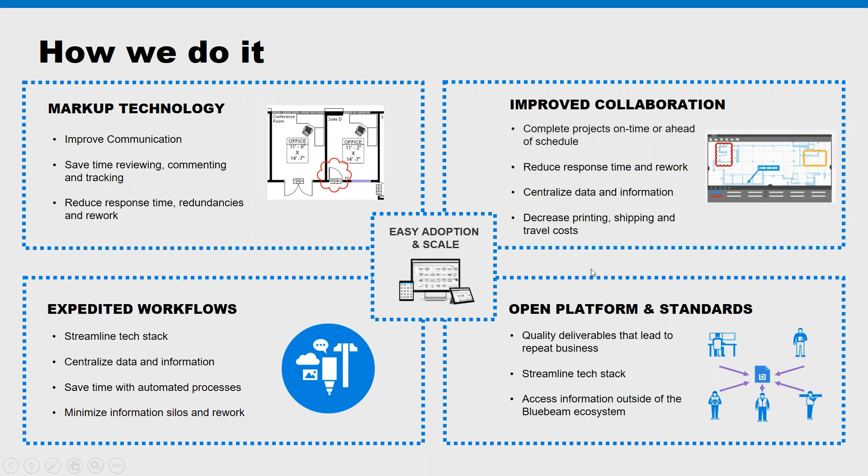And lastly, Bluebeam Revu is really a product that is easy to adopt and scale. So the learning curve is not terribly steep, and it's relatively straightforward to deploy that across your organization and all your different teams. And that's absolutely something that SolidCAD can assist you with as well.

Now, going into Revu 2018, the biggest difference between Revu 2018 versus previous releases is we did have a substantial update to our interface. So our interface is very much new and improved. It's designed to be a lot more intuitive. You can get what you need to get done accomplished in less clicks. It's easier for new users to pick up and learn, and it's easier for existing users to discover new features that maybe they didn't even know about and haven't been able to utilize yet.

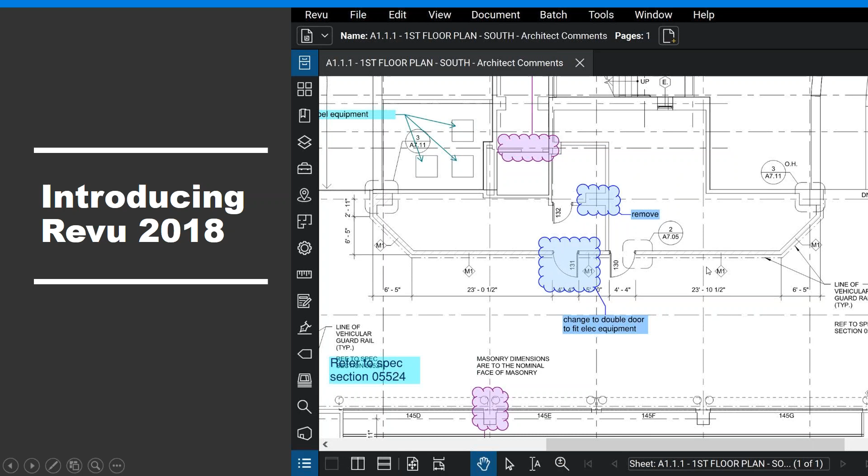So a few other things that are also new in this release, which I'll show you in a live demo very shortly here: we do have a new Properties Toolbar, which makes it a lot easier to adjust markup properties on the fly. We've improved the experience working with our side panel, so it's easier to get to the tools that you're using frequently. Our Studio interface, that cloud collaboration platform, is greatly improved. It's a lot more user-friendly, particularly when uploading files and folders, and I'll show you more about that shortly.

And custom keyboard shortcuts. This is a huge one. Believe it or not, the all-time most requested feature that we've gotten from customer requests, not just in the last year, in the entire history of our company, was custom keyboard shortcuts. And that has become a reality in 2018. So you can now create your own shortcuts for commands or change existing shortcuts to your preferences. And I'll show you that as well.

And lastly, there is now an in-app onboarding experience. So this is going to help your new users, or maybe people who are just new to Revu 2018, to get more quickly acclimated and trained on how to best utilize the software with that in-app onboarding experience.

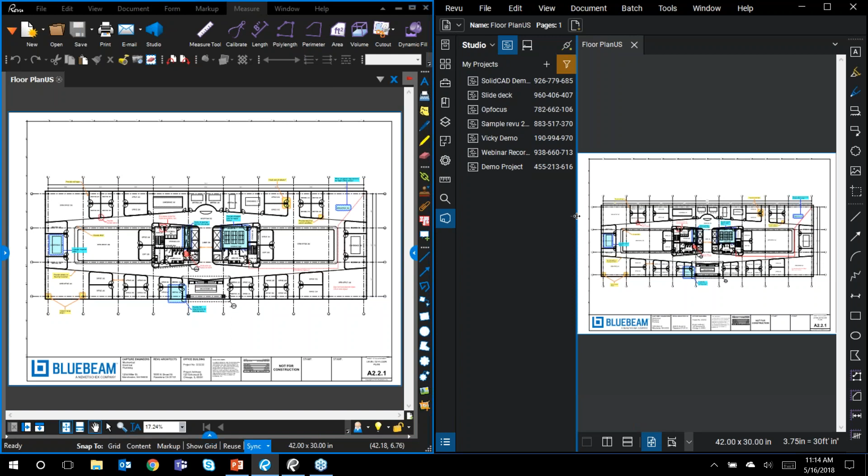Something else that's a quality of life improvement is for this markups list at the bottom. In 2017, the old version on the left, again there's that blue pull tab—I can pull this up and view my markups list there, but it wasn't always super intuitive for folks to find. Now we have this handy button right here where no matter where you are in the software, you can just click it and pop open that markups list in one click for easy access. It just makes accessing the markups list a little easier than before.

Going back to displaying or hiding these tabs, just like in the previous version, you can customize the interface and then save that as what's called a profile. I have all these different profiles loaded in the software ahead of time, and you can see I actually made a custom profile as well. If I jump into that custom profile, it adjusts the interface to exactly how I had it set up, with the tools and tabs I want toggled on. So profiles did exist in the old versions as well.

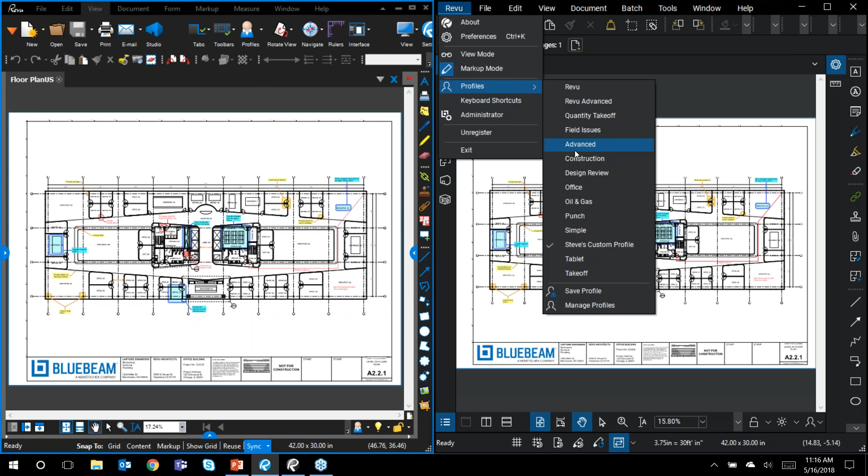They just live in a slightly different location. In the old version, I had to go to View, and it would show up in my ribbon, then I could select the profile that way. In the new version, I've got this Revu drop-down right here, easy for me to select, and I can switch profiles that way. So just a little easier to find and use than before.

Something else I want to jump into that's an enhancement in the 2018 interface is what's called the Dynamic Properties Toolbar. Essentially, this toolbar at the top is going to dynamically change depending on what I'm doing in the software, giving me quick and easy access to settings most appropriate to whatever I'm doing. Right now, since I just have a document open and I'm not doing any markups or anything special, the dynamic properties are pretty simple—it's just showing me the document properties.

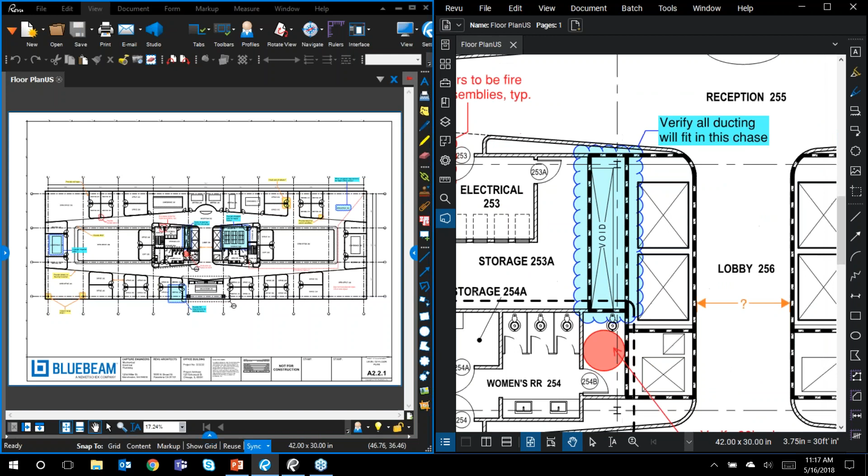Now if I zoom in and select this markup as an example, you'll notice this properties panel or properties toolbar has changed now. So now I have all of these different visual properties that I can adjust on the fly, so maybe I want to change that line to green and my fill to be green.

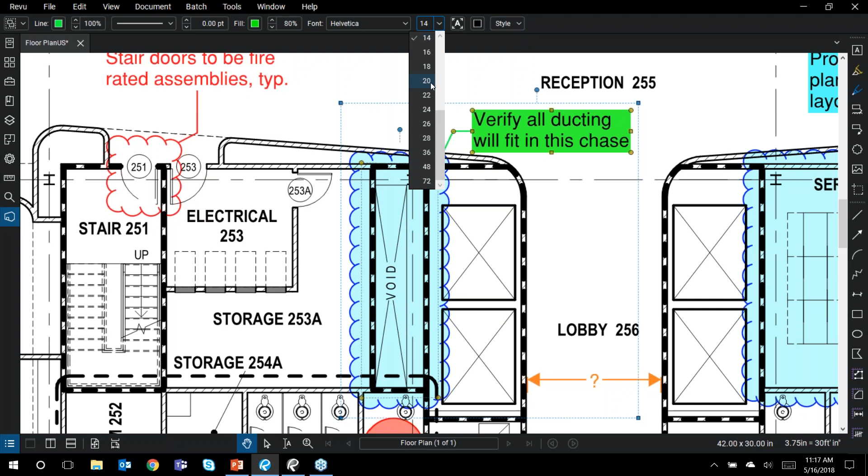And maybe I want to change my font size and so on and so forth. I can adjust that sort of on the fly very quickly there.

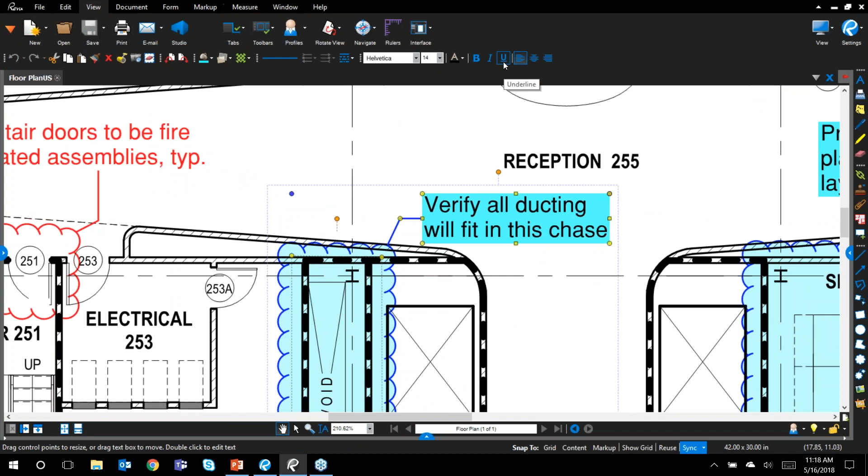Now how this compares to 2017, if I jump into the old version, let's select that exact same markup. You'll notice when I select it in the old version, I don't have necessarily all the properties right at the top. I need to dive into the side panel, find this properties tab, and then I can update some of the visual properties here.

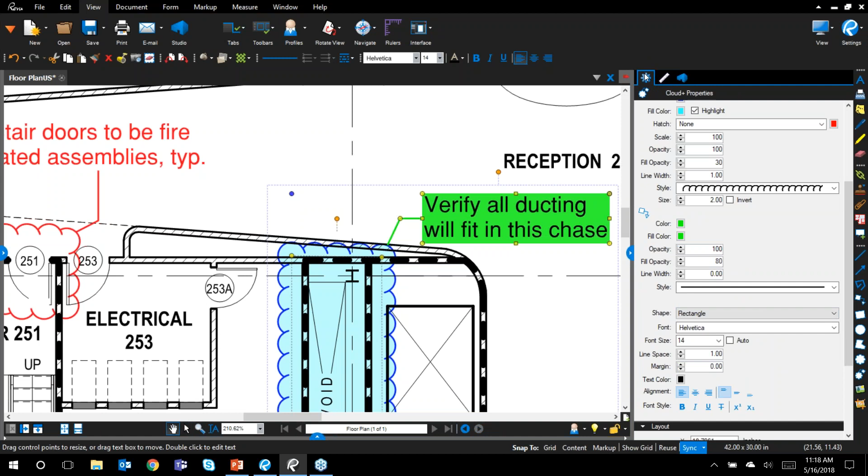Now, it's not that this is a really terribly cumbersome process, but it's just not super intuitive, particularly for new users, to know that you have to specifically go into the side panel and find this one tab to update it. So the new version is just a lot more user-friendly. You can just select the markup and you've got all your properties right here at the top, easy access. So that's a big improvement, quality of life improvement in 2018, that dynamic properties toolbar.

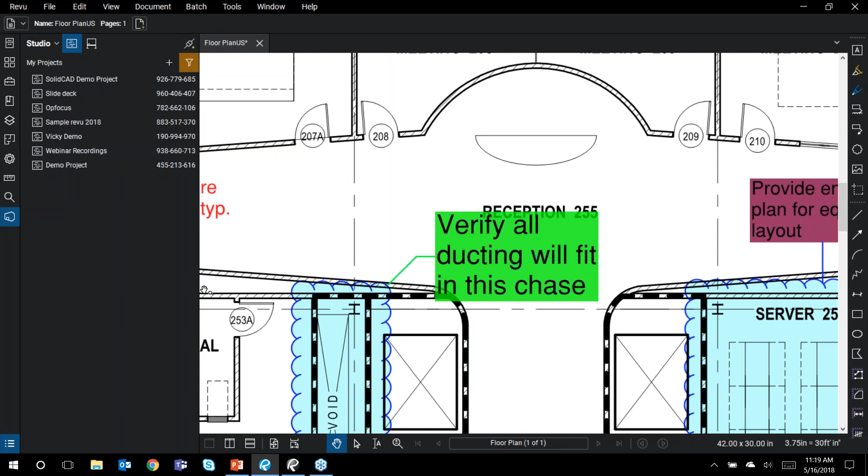Now let's go back into talking about some of these side panels here. Let's pop open the side panel again. I want to use my tool chest as an example here. So for the folks on the line that have used Bluebeam Revu before, you've probably had some experience working with the tool chest where you can save custom markups.

One piece of feedback that we got from a lot of customers is it would be nice to easily be able to adjust the size of these thumbnail images, and this is something you can do in 2018 now. So we've got this handy slider here. I can just on the fly adjust these icons to be smaller if I want to see more icons at a time, or larger if I want them to be more easily visible.

This is particularly useful if, let's say, you're working on a small laptop screen, or maybe on a Surface Pro tablet, and you want these icons to be very large and easy to select. You can scale them larger, or vice versa. So really nice to have that flexibility.

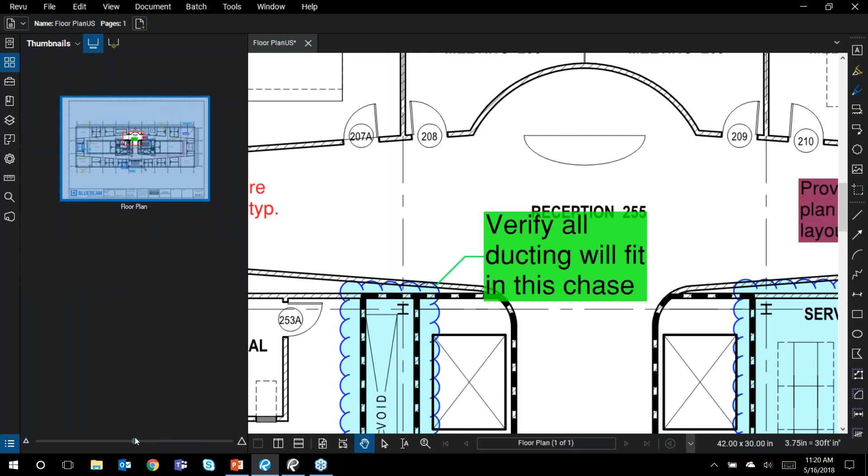You can do the same on the other tabs. So for example, I'm on my thumbnails panel where I can see a thumbnail of this page we're looking at. I can adjust this to be larger or smaller as well. So some nice improved flexibility there.

Looking at the tool chest, another improvement that we've implemented is we've made it easier to toggle different tool sets off and on. So looking at the tool chest, I've got my architect review tool set, my contractor review tool set, my engineer review tool set, and several more.

If I want to toggle these off and on, now up here at the top in tool chest, I can just click this dropdown and you can see all these selected. If I want to toggle off my contractor review tools, I can just click that and you'll notice that they're now hidden. If I want to bring them back, I just select that and toggle them back on. So just a lot more easier, on the fly adjustments to the different tool sets that you're using. That's another improvement in the 2018 version.

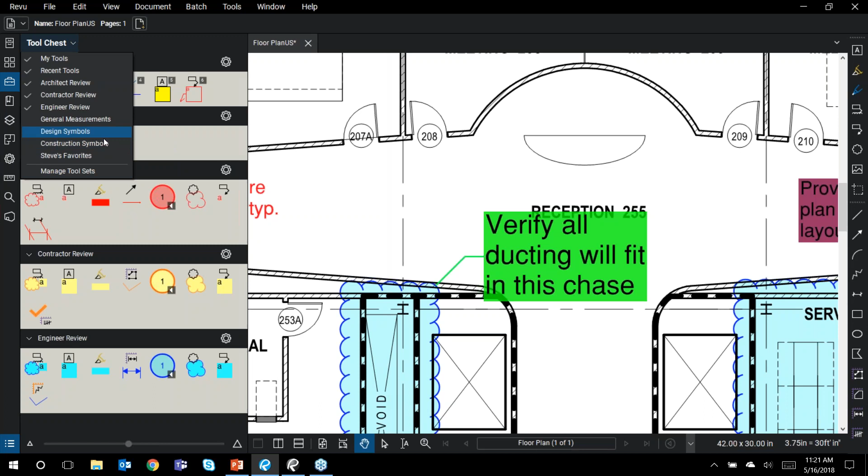Something else that I want to dive into that is a little easier is, in the markups list, managing your columns. So in the past, the way that I would adjust some of the columns in my markups list, let's go back to the old version.

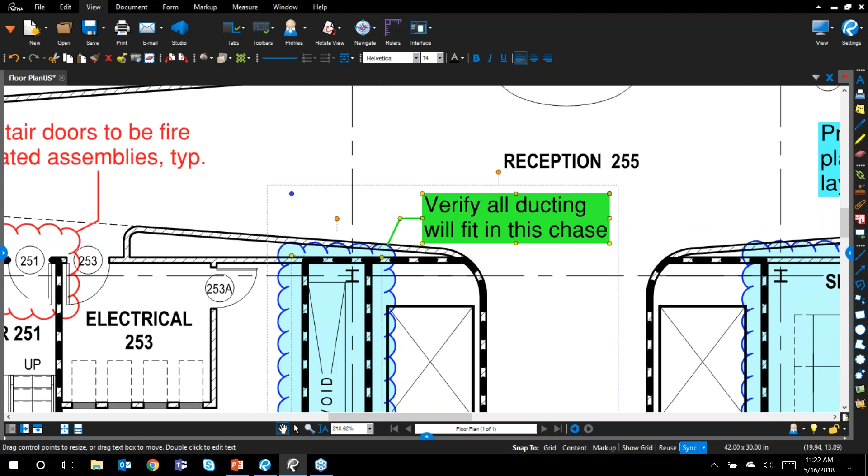So we're back in the old version, 2017, now. The way that I would adjust these columns in the past is I open the markups list and I have a specific dropdown just for columns here, and this is where I would toggle them off or on.

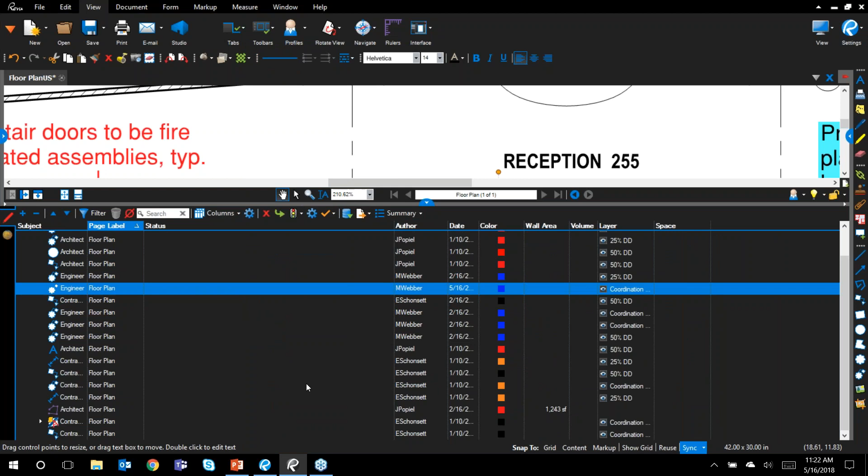That's not terrible by any means, but in the new version, rather than having a totally separate drop down just for columns, now I can just click this markups list drop down, and right here at my fingertips, I've got all of my options for columns again, so I can toggle these off and on however I would like. And then also in that same drop down, I've got my markups options to import markups from other users.

If somebody else independently marked up their own copy of this drawing and I just want to pull in all their markups onto my copy, import would allow me to do that. Or if I want to export markups to somebody else, I can do that here.

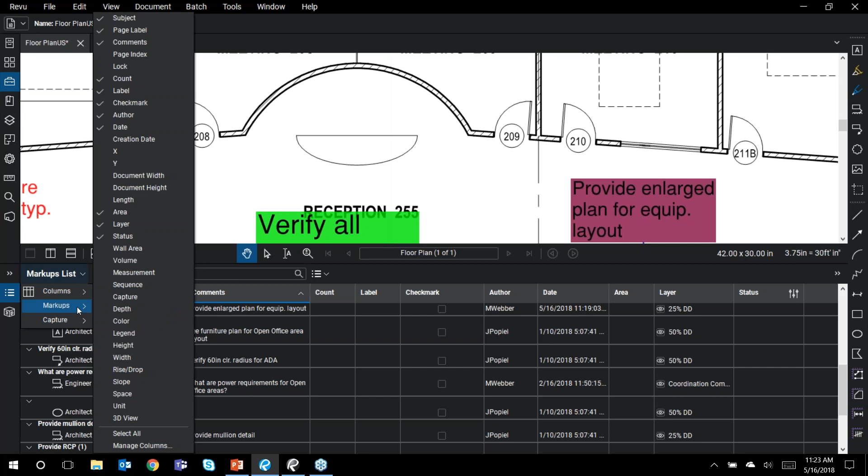And then lastly, capture. If I want to create a capture summary or export my capture media, I can easily do it here. So what's happened here is we've taken three separate menus or drop downs, and we've consolidated it into one cohesive drop down. So you're able to get to what you need to do faster and with less clicks.

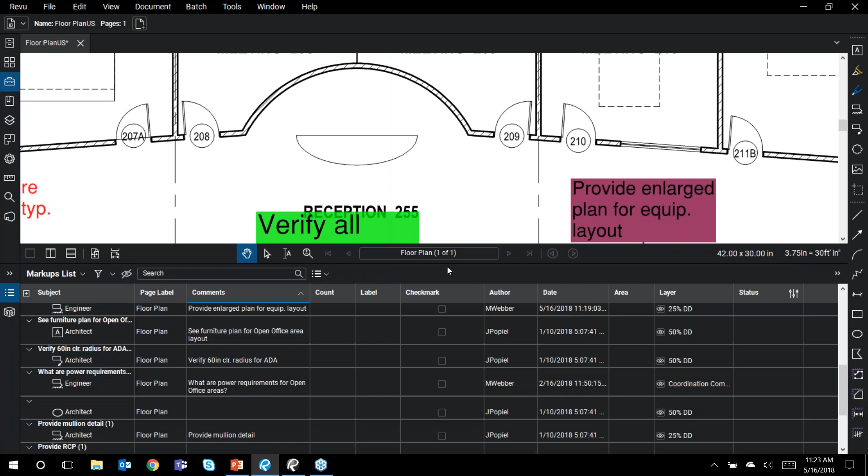Something else that's really neat that we've introduced in 2018 is this button right here to quickly hide markups. So if I want to view this drawing without any markups on it, I can just click on this hide markups button and immediately toggle off all of the markups so that I'm just looking at the PDF content. And then vice versa, I can click it and bring all of my markups back. This was another very commonly requested feature that we've implemented in 2018, and I think it's really, really super helpful.

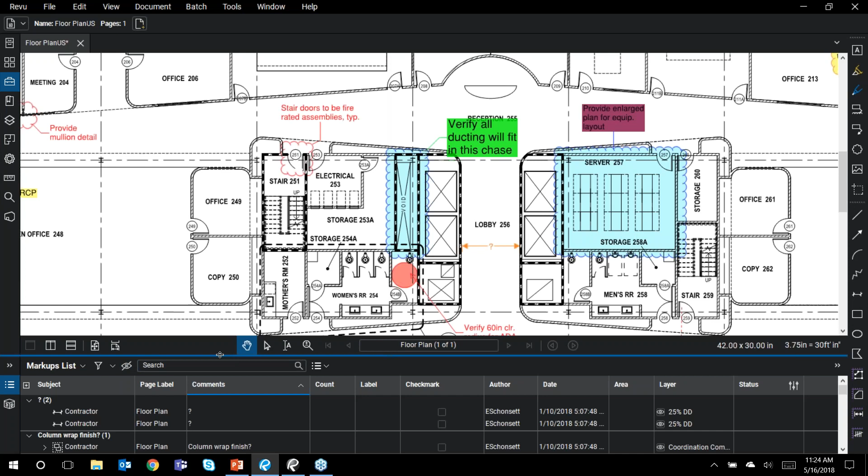Something else that is a little easier in 2018 is setting up filters. So right here, I now have an option to immediately clear all of my filters if I so choose. Before I had to toggle off each individual filter. And just like before, you're able to filter on any column that you would like.

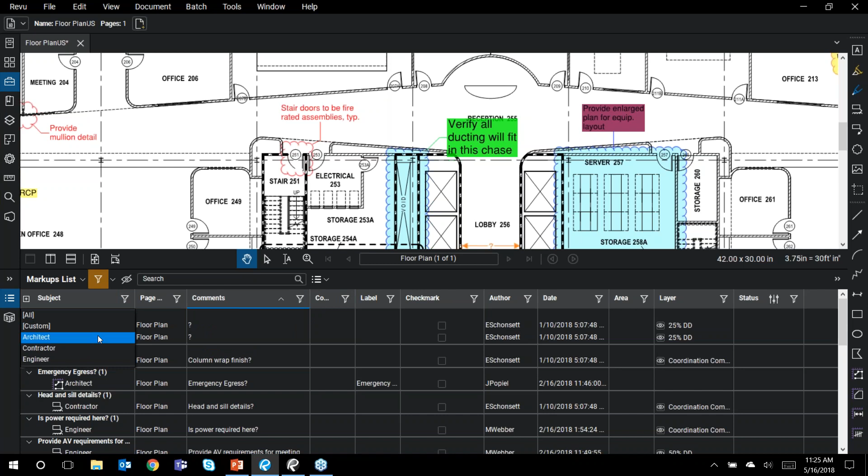So as I'm clicking this filter, you'll notice the different options that are presented to me. I'll use subject as an example, and let's filter down to only my architect comments. You'll notice as we look at the drawing that only my architect comments are still in color, so they pop out at you. The other markups are sort of grayed out, so it makes them not as visible.

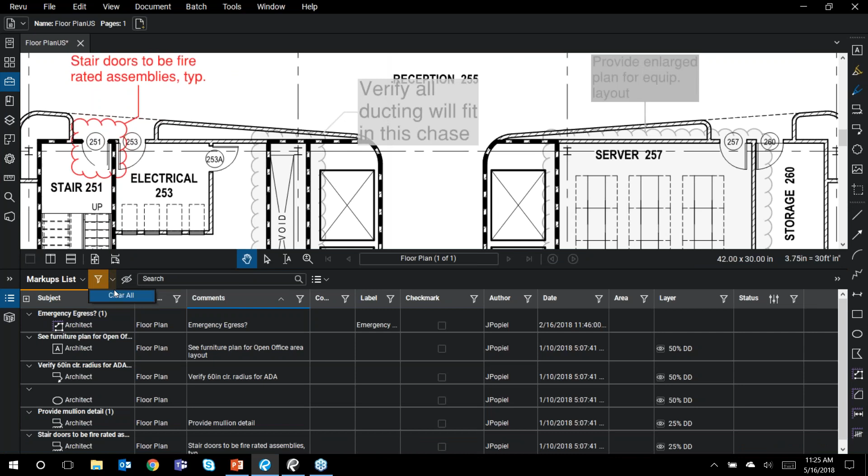But I can just go clear all and clear those filters and bring back all those markups there. So just a little easier usability in terms of filtering the markups list.

Something else that's new and really cool in this version is when you're doing a markups list summary. Let's say I'm going to do a PDF summary. In the past, you could only export a summary for the specific document that you happen to be looking at. But in the new version, I can do multiple files. So if I wanted to add more files or more folders and subfolders and do just one giant markup summary report for all those different documents, I can do that right from the summary page.

Additionally, in the past, before you did the summary, you had to set up all your filters and columns in the markups list ahead of time in order to get the export that you wanted. It was really something that you had to know about ahead of time, so it wasn't super user-friendly to change on the fly. That's no longer the case.

Now I can quickly apply additional filters right here from the summary page, and I can also toggle off and on whatever specific columns I want to be on this report easily from this summary page as well. So this is another quality of life improvement, giving you a lot more flexibility to adjust what shows up on your summary report without having to know exactly how you want to have it set up ahead of time. So just a lot more user friendly.

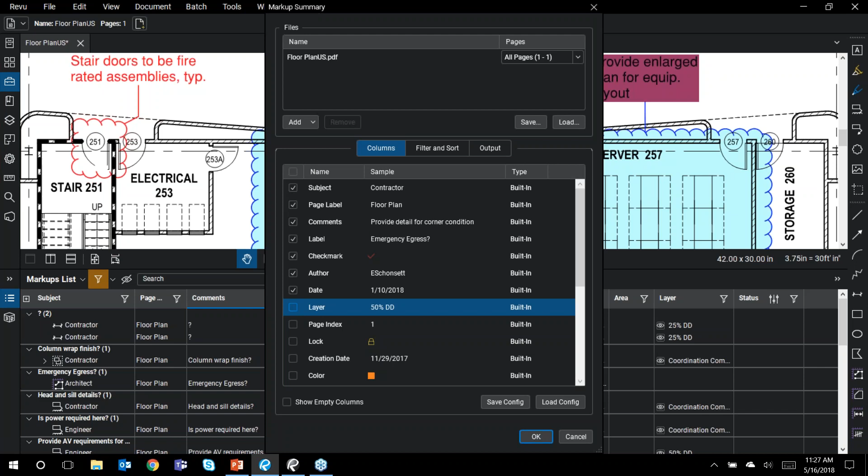So let's switch gears and talk about Studio. Studio is our cloud collaboration platform. It's included with all of our versions of Revu. So if you have seats of Revu, you already have access to Studio. And I'm going to show you the Studio experience in the old version and then in the new version so we can compare and contrast.

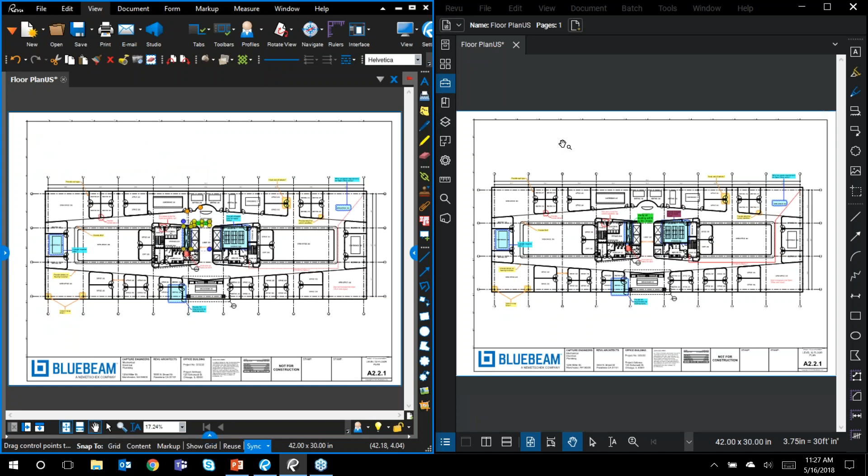So let's go back to our split screen view. I'll go ahead and hide that right there. Let's go back to split screen and view them side by side. Again, I've got the old version on the left-hand side of the screen and the new version on the right-hand side of the screen. In the old version, the way that you would access Studio is you would go into whichever side panel you had Studio on. You click on Studio and go ahead and log in.

You have all of your sessions and projects that show up in one long list, so you find the one that you're looking for. I'm going to go into the SolidCAD demo project.

In Studio Projects, you have this folder structure depending on how you upload things. You can double click on these files to open them up. Studio Projects is sort of a check-in, check-out model, so only one person can actively be making changes to one document at a time. I basically click on this drop-down and I can check out this drawing and start working on it.

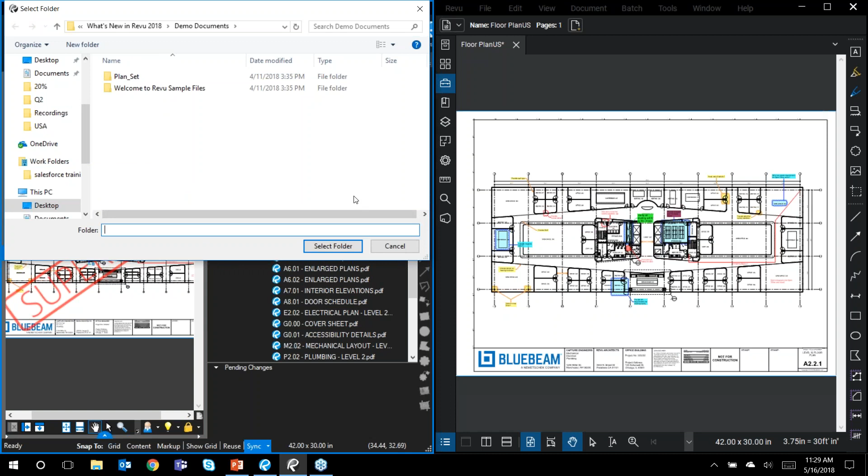When I'm done, I can check it back in to update the server copy. Now, what was challenging about this older version is that if I wanted to add in files or folders, I could not simply click and drag them in. I had to right click and then upload files or upload folders, and then find where those files or folders were saved on my hard drive. So just a few extra clicks to find what you're looking for.

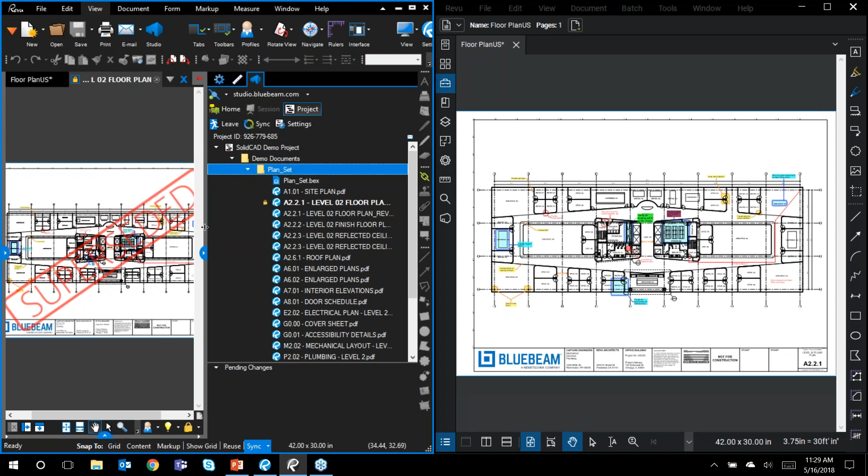Something else that was challenging about projects in the old version is that if you were working with multiple Studio projects and wanted to bounce between them, you were limited to only having one Studio project open at a time. So if I needed to switch to another one, I had to completely leave the project I was working on and then jump into that other project. Again, just not the most user-friendly experience if you're jumping between lots of Studio projects.

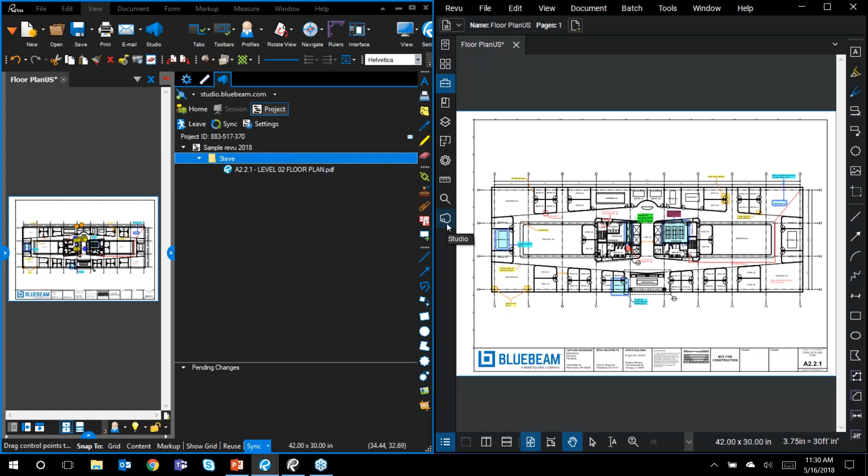So let's switch gears and look at that in 2018, in the new version. On the right-hand side of my screen, I access Studio from this handy icon right here. And unlike the old one, which just showed you a slightly intimidating list of all your sessions and projects in one big list, it breaks it out into projects and sessions, so I can quickly toggle between the two.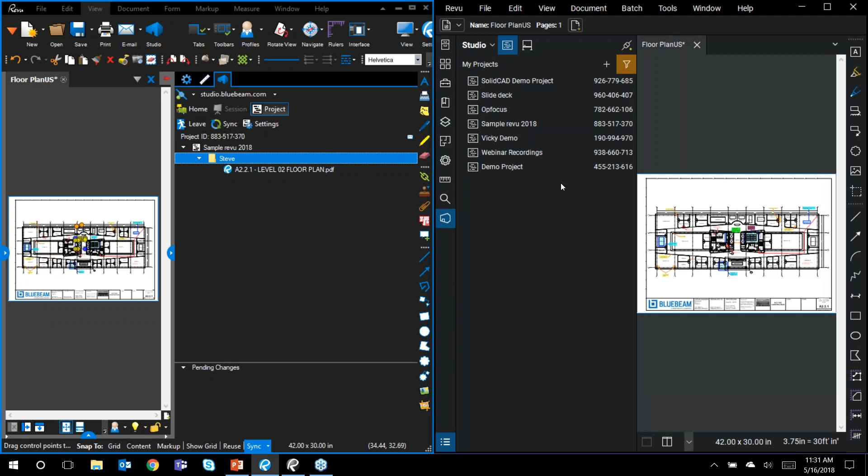I've also got these handy filters where I can filter it down to just my sessions or projects that I've created, or just other people's that I've attended, or I can see everything, or sort by when I most recently accessed them, name, or ID. It just makes it a lot easier to navigate. If you've got a lot of sessions and projects you're working with, it makes it easier to find specifically what you need.

I'm going to go ahead and maximize this so it's a little easier to see. Now let's jump into that SolidCAD demo project again, and you'll notice the interface looks substantially different. I still have this folder tree structure in the side panel that I can click through if I want, but I can also click through some of the folders right here in the middle of my screen to navigate around there too.

Now, something else that's really cool is in the new version of Revu in Studio, you can click and drag files and folders into here. It's almost like the functionality you'd see in Google Drive or Dropbox, where you can just drag in a folder. It makes it easy to do that.

So let me actually just pick something to upload here. How about this material takeoff PDF? I'm just going to click and drag it, and you'll notice that it just dropped right there into my Studio project. So a lot easier to upload stuff in there.

Something else that's really cool working with Studio in 2018 is you can have multiple projects open at the same time. So let's say I also need to work on this demo project and grab some files from there. I can double click that, and it's just going to open up this project in another tab. So I am in two different projects at the exact same time, and that's no problem at all.

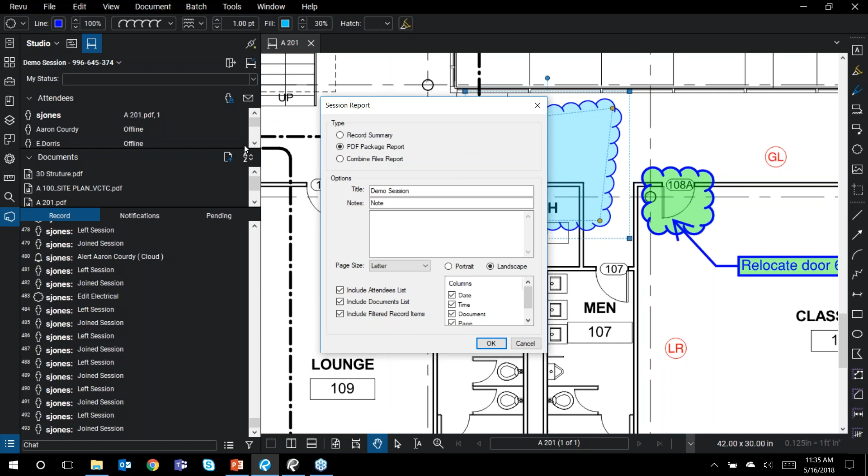So the next thing I want to jump into is talking about custom keyboard shortcuts. This is actually something I cannot show side by side with the old version because it didn't even exist at all in the previous version.

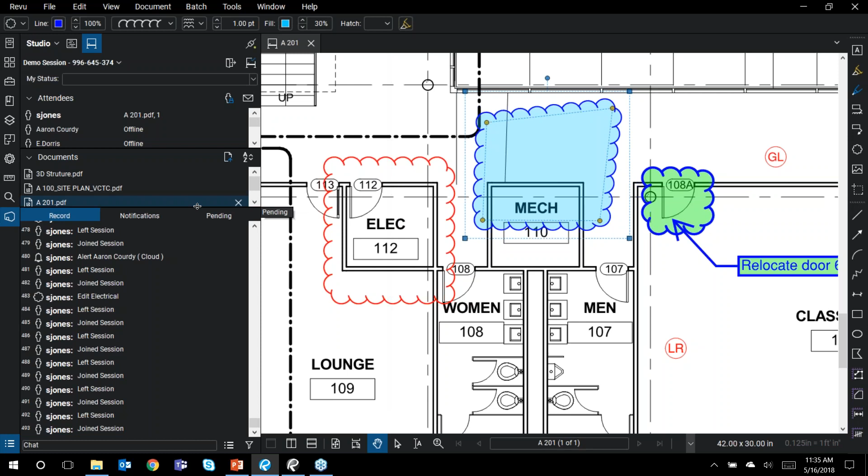A really common request was to be able to create custom keyboard shortcuts or override the defaults for keyboard shortcuts. And the way you do that in 2018 is right here in this Revu drop-down in the top left. I've got keyboard shortcuts right here. So just 2 clicks and I could get to all my keyboard shortcuts.

You can see all of the default keyboard shortcuts for markup tools here. And then also up here at the top, I can toggle over to commands, and you can see some of my different commands as well. Not all of them necessarily have hotkeys assigned, but you can absolutely assign some of your own.

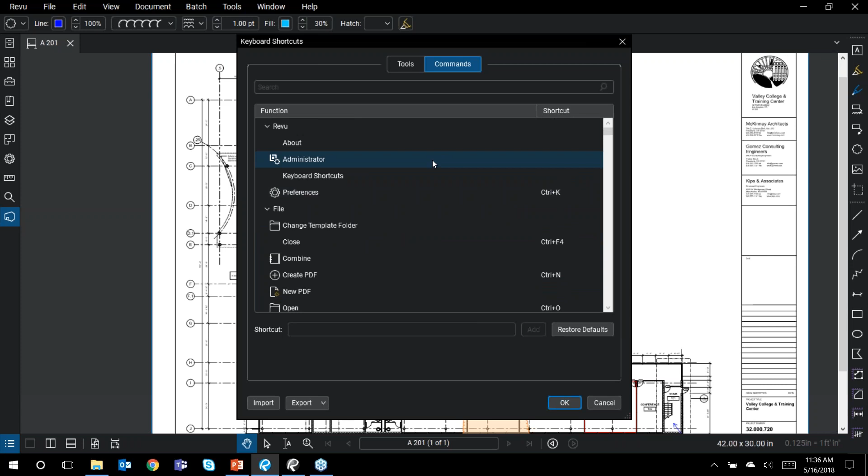So let's take a look at how to do that. I'm going to use this arrow tool as an example. Let's say that for my specific workflow, I'm using the arrow hotkey constantly, and I really don't want it to be A—I want it to be Q instead of A.

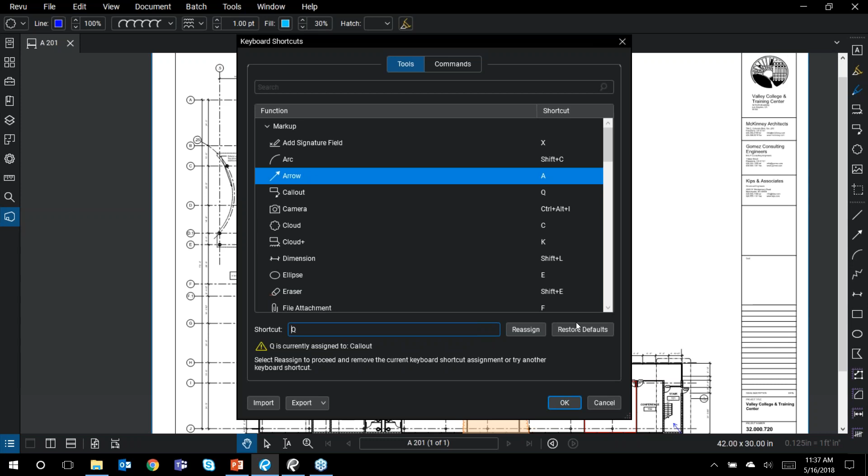So what I'm going to do is select this arrow, and it's telling me the shortcut is A. So I'm going to delete that and do Q instead. And what it's telling me here is that Q is actually already assigned to another tool—it's assigned to my callout. And I have a couple of options here.

One is that I can just look for some other options, maybe T or M, etc., so I can keep looking for something available. Or if I don't want to do that, I just want to override whatever was taking that hotkey, so I can just do reassign. You can see I just reassigned arrow to be Q now. So now anytime I hit Q, it'll jump to my arrow key.

Now, callout used to be Q. I overrode that, so it just deleted the hotkey for callout. So let's say I want callout to be A. I can go ahead and set it as A and add, and now I've got a hotkey for callout as well. So very easy to update this stuff on the fly.

And hotkeys, just like profiles and tool sets, can be exported out to other users. So if you want to export your settings and share them with other users, you can absolutely do that. Conversely, if you want to import hotkeys that somebody else sent you, you can do that from this import command right there.

This is particularly useful. Let's say your organization has certain teams repeatedly using specific markup tools, and you want to make it easier on your users by setting up some hotkeys for them. You can do that and then easily share those across all your different users.

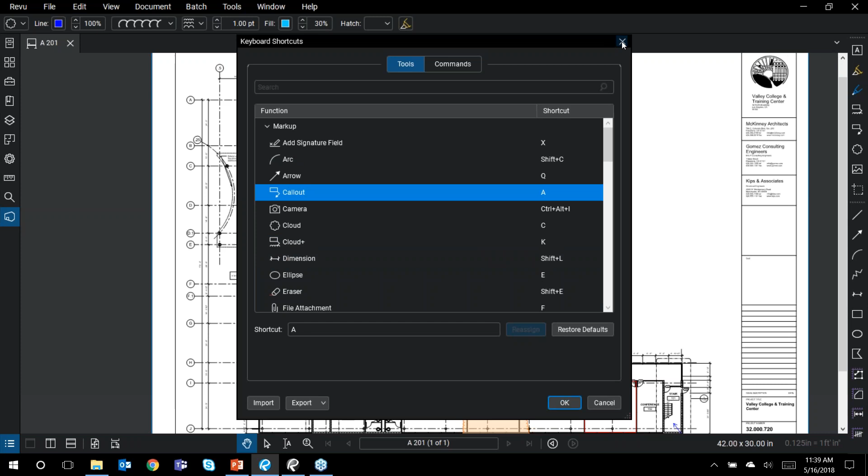From here, I want to go into that in-app onboarding experience. For brand new Revu 2018 users, the first time they open up the software, there's an in-app onboarding experience to make that process a little easier and help them get acclimated more quickly. If you go to the Help menu, Welcome to Revu, this is what you'll see by default the first time you open Revu 2018. This is immediately going to pop up.

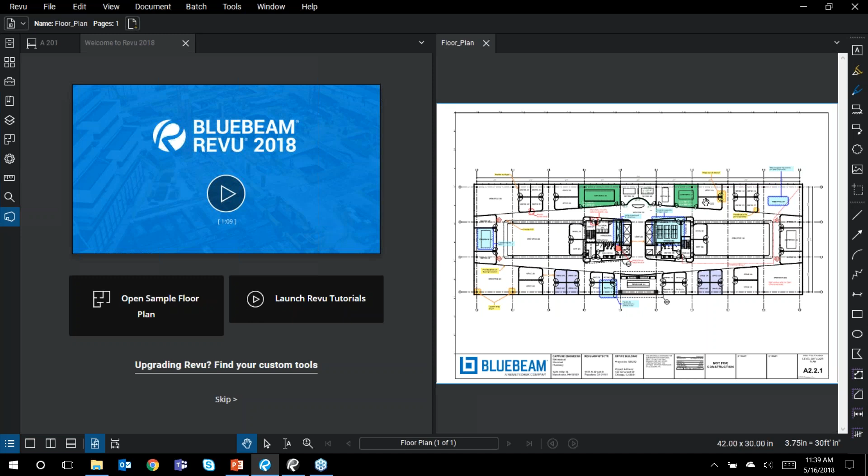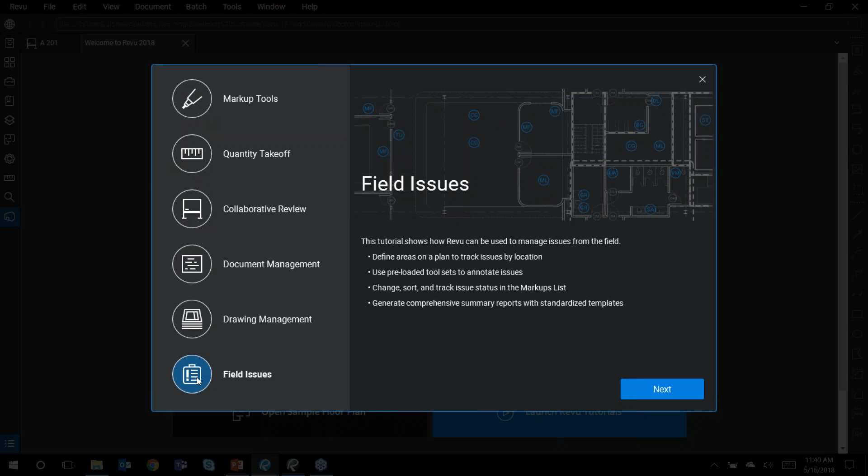You have a cool, one minute quick overview video of 2018. You've got a sample floor plan right here in the software. If you click that, this is the exact same floor plan we've been looking at in this webinar, so you'll actually have a copy of your own that you can test and train on. We've also got Revu tutorials - specific workflow tutorials on how to use markup tools, form quantity takeoffs, collaborate in Studio, managing your documents, drawing management, and field issues. These are the six that are preloaded with the software.

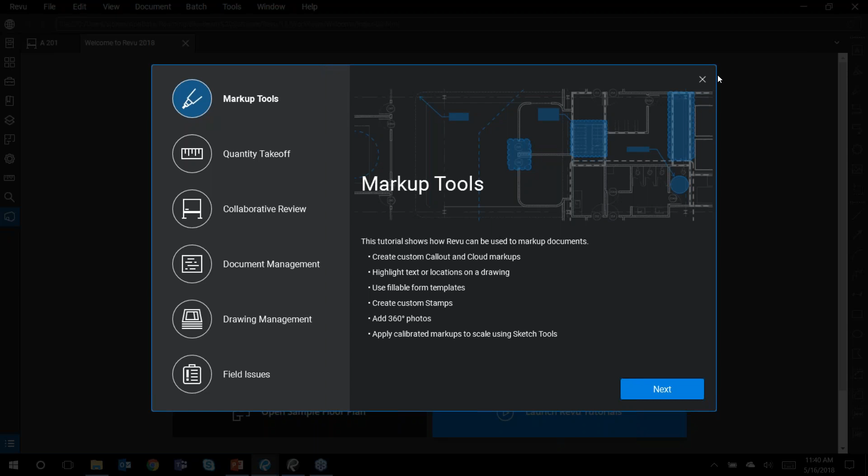The plan is that over time we're going to be adding additional content that covers other workflows. We want to make it as easy as possible for customers to learn the new version and get acclimated, and make sure they're fully aware of all the features available to them so they can benefit. So, really great in-app onboarding experience. You'll see this by default the first time you open the application, and if you ever want to reference back to it, just go to Help, this option right here, Welcome to Revu, and it'll pop open this screen again.

The last thing I want to hit on before we recap and open it up to Q&A is talking about view mode versus markup mode. In the past, we actually had a standalone product that was a free viewer.

It was called Bluebeam Vu, and it was kind of a read-only viewer. Essentially, it was available for folks who did not have licenses of Revu to use in order to view documents, and it also allowed them to jump into that cloud collaboration platform called Studio and have access to sessions and projects.

There was a few pieces of feedback we got from customers. One was that for folks who were having to bounce between a full-blown license and just a viewer, they kind of wished they didn't have to have a completely separate standalone install. Also, for our customers utilizing the open licensing model, that floating concurrent user licensing model, they did not like that if somebody just opened a drawing in Revu and all they were doing was looking at it, not marking up or doing anything, that was still taking up one of their licenses.

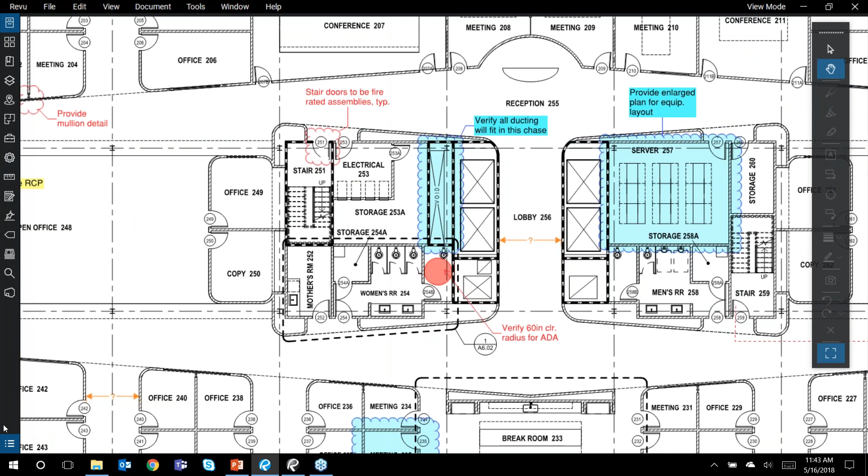Now it essentially switches me to view-only mode. So if I open up this floor plan again, I can look at it and view the markups in the markups list, but I cannot place any new markups because I'm only in view mode. Now, if I was an open licensing customer, the great thing about being in view mode is that I'm not taking up one of our licenses.

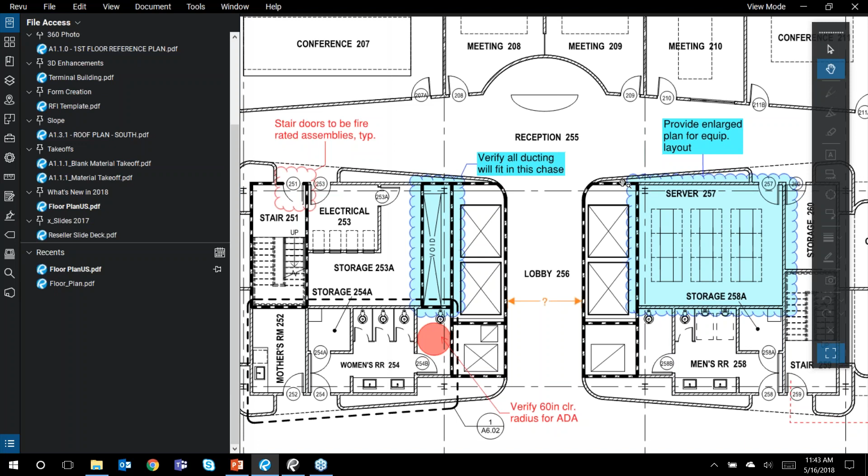Now let's say I need to place some additional new markups on here. All I have to do is switch over to markup mode. If I was an open license customer, it would check out a license for me, and all my markup tools are unlocked again. I can drop that markup onto the document as normal. So just some increased flexibility switching between full-blown Revu versus the view-only reader, without having to install a completely separate application.

So with that, that's really the material we wanted to cover today regarding the interface changes and updates to 2018. We here at Bluebeam definitely think that 2018 is our best release yet. We think this interface really helps make the software more powerful and intuitive than it's ever been. We've gotten a lot of great feedback from customers thus far, and I hope for all the folks watching this webinar that you have a great experience with 2018 as well.

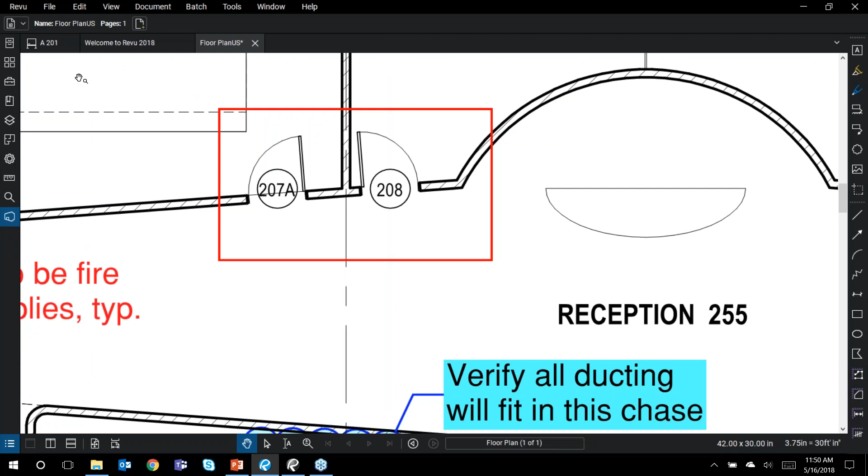In Studio Sessions, you can have up to 500 simultaneous users marking up and collaborating on the same document at the same time. If I look at my attendee list, it looks like 6 different people have attended this session at any given time. I'm the only one in here right now, but you could have up to 500 people in there at the same time marking it up in real time. As soon as somebody else places a markup, everybody else in the session is going to see that live in real time.

You can apply this across lots of different workflows, and one example where it's really powerful is with design review. You can have all the different folks on the design team just hop into a session and collaborate in real time, rather than having to email PDFs back and forth, or worse yet, physically mail paper plans back and forth. So that's a great question.

Another question regarding Studio Sessions: is it possible to run a Studio Session on a local server and not in the cloud? The answer to that is yes. If you want to use the cloud-hosted Studio Sessions, that's just included with Revu, so you already have access to it, it's not an additional fee. If you want to run it locally on your own server, that does require a separate product, and it's just called Studio Server.

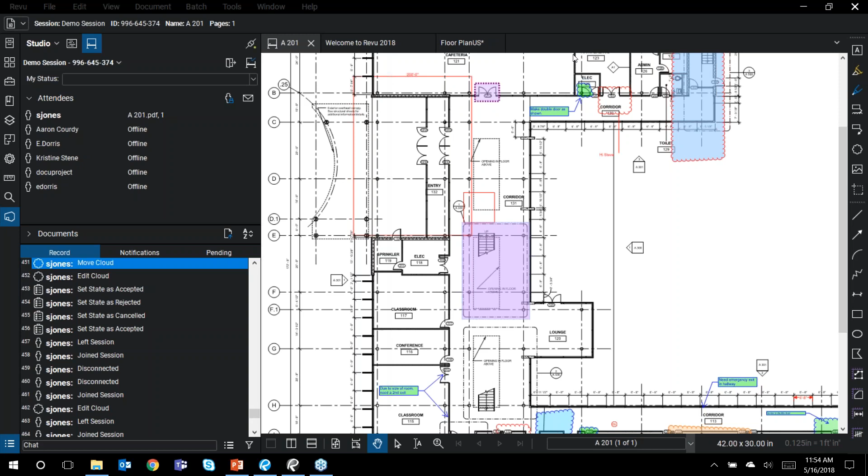I don't have any more questions in the questions window. We've got about 6 minutes left, so feel free to type more in there. Okay, it doesn't look like we're getting any more questions, so I think we'll just go ahead and wrap things up here.